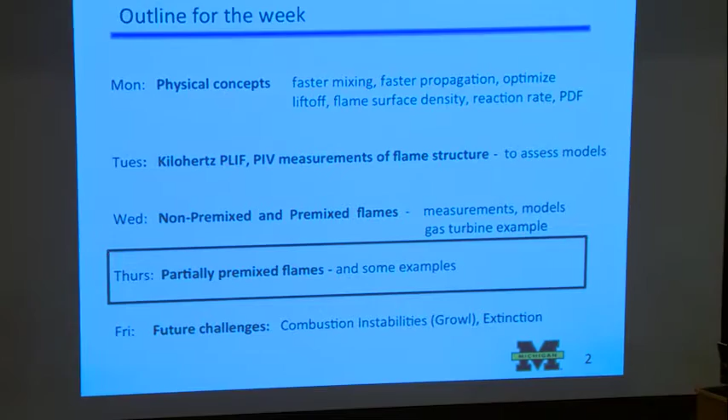Yesterday I told you about the non-premixed work, some simple models, and the database work done by Rob Barlow and others at Sandia, and Dreizler in Darmstadt. For premixed flames, we have several - 4 or 5 models - being used. Partially premixed flames is relatively new, and I'll give you some papers to look at if you're interested.

So first I'll define partially premixed combustion. This is not fully agreed upon by the community, but I think we're starting to agree that partially premixed means sometimes there are premixed flamelets and sometimes there are non-premixed flamelets. Now, the only thing we've considered is flamelets. If there's a distributed reaction zone, that's another situation requiring even more complex models. But let's limit ourselves to flamelet type models and measurements, where both premixed and non-premixed are present.

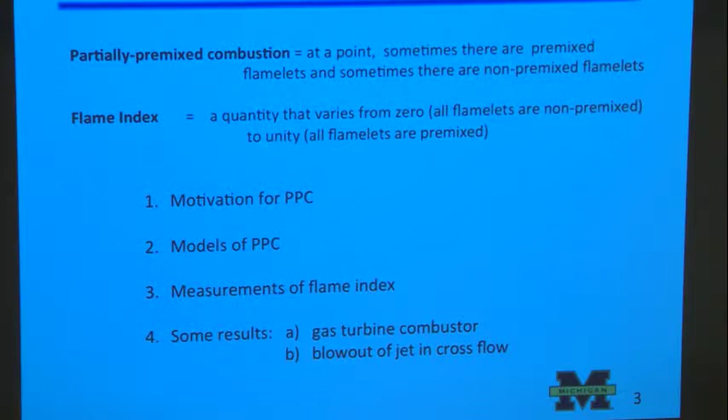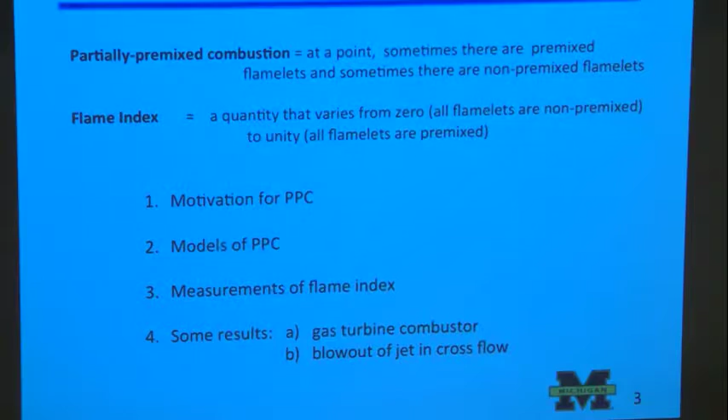Takeno from Japan had a group of students working with him doing DNS, and they analyzed a lifted jet flame. They found that at the base of the lifted flame there were regions of premixed flamelets and regions of non-premixed flamelets. So they started using this flame index, which we're starting to call the Takeno flame index. It's a quantity that varies from 0, if all flamelets are non-premixed, to unity, if all flamelets are premixed. This will help us model these problems.

So I want to talk about motivation, some models, some measurements that we've done, and measurements from people in other labs, and how this might apply to some problems.

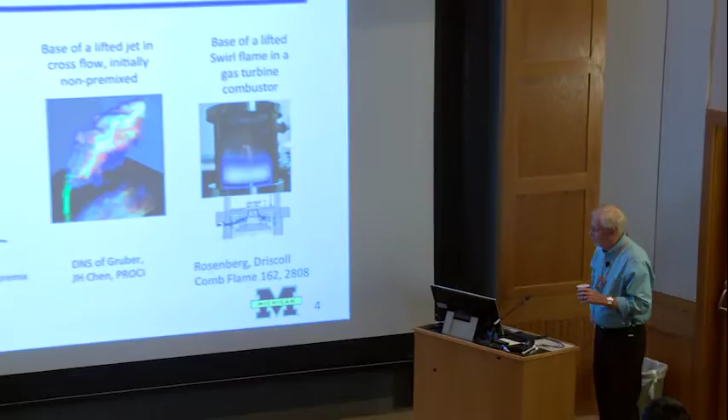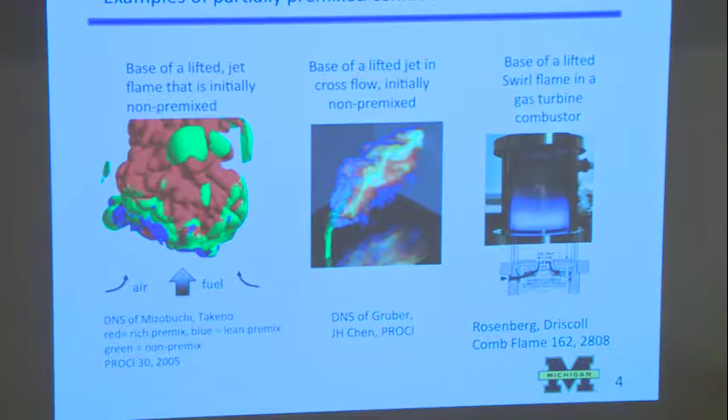Here is the DNS of Takeno and Mizobuchi in Japan. They had a very large computer. They only dealt with hydrogen and air - today we can probably do a little better, maybe methane air, but a simulation like this would be hard to do with complex hydrocarbons even today. They have a lifted jet flame, with fuel coming out of a tube and air being entrained in.

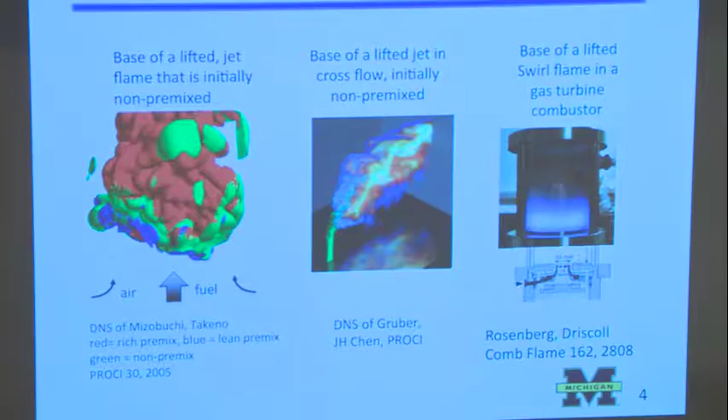The red is the rich premixed region, the blue is the lean premixed, and green is non-premixed. You'd ask, where's the triple flame? I think you could argue there are some triple flames in there - the triple flame would be non-premixed, shown green, with some red and blue on either side of it.

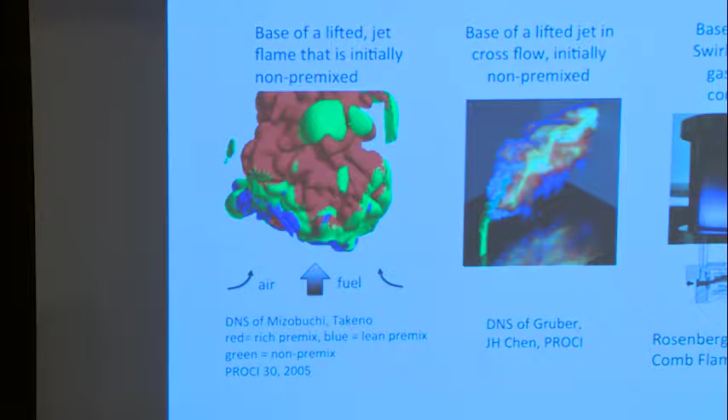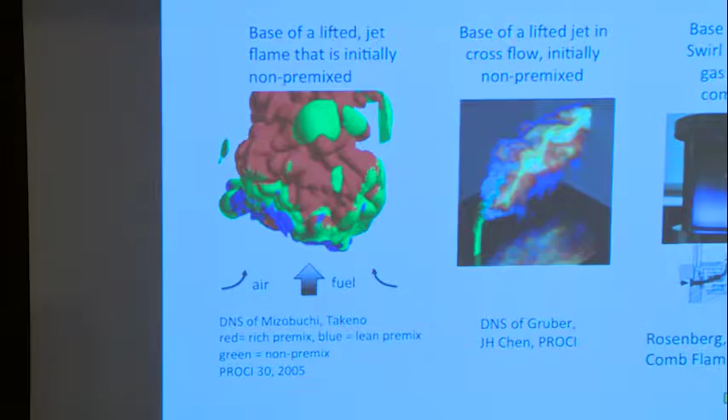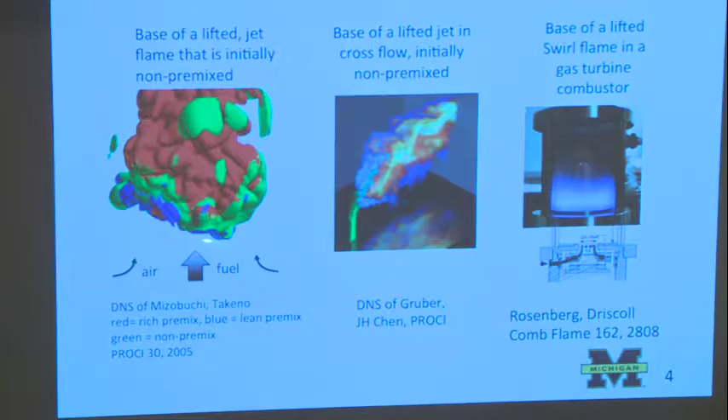But the other question is, where's the flame base? You can see it's three-dimensional and unsteady. In the past concept, the base of the flame - let's say right at this point - has a propagation speed trying to move upstream, and that would be the blue lean premixed region. This blue region would try to move upstream at some burning velocity, and the gas right at that point would be coming at it at some velocity. If the two were matched, then at least at that instant, this region would stay there.

But then at a later instant, the gas velocity would be higher, and it would push this blue region up, and maybe the gas velocity would be lower over here, and it would allow this blue region to come down. So you can see that it's clearly three-dimensional, and even with a laser light sheet, you're not going to solve the problem. You need three-dimensional diagnostics to do the experiment. You need three-dimensional DNS. So it's a tough problem, but a very important problem.

I gave you some formulas last time that said the height of the liftoff region is proportional to the velocity of the fuel coming at it, and inversely proportional to the laminar burning velocity squared. So you raise this velocity, it lifts off; you put some hydrogen in here, and it'll go to a lower, more stable location upstream.

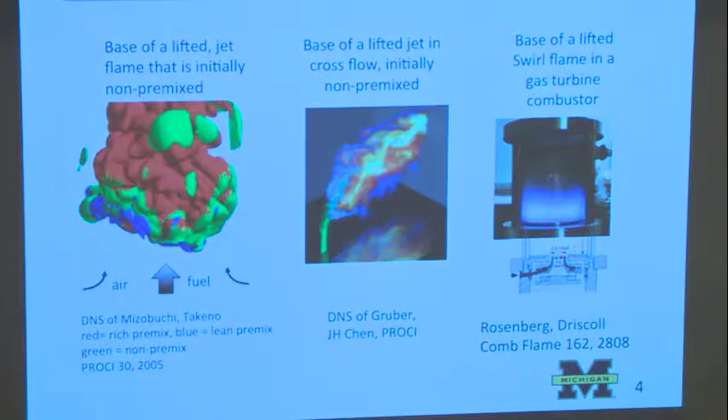Andreas Gruber, who's from Europe, I believe Norway, and Jackie Chen, who's at Sandia, published this work in the Proceedings of the Combustion Institute. Another example is the DLR burner that Wolfgang Meier and his group developed. We ran it, and a student named David Rosenberg ran it, and we looked at the degree of partial premixing in that burner. I'll tell you about it.

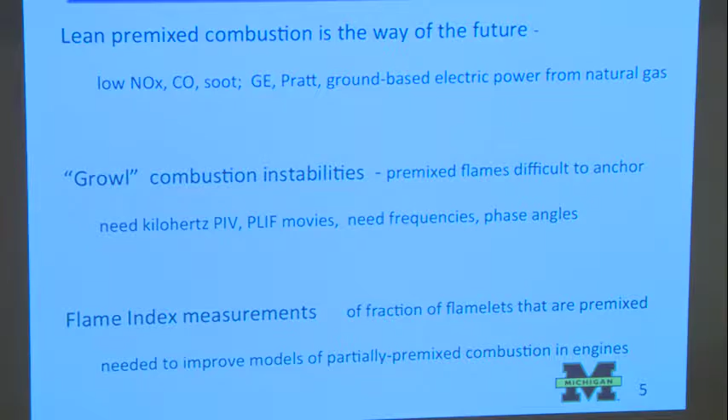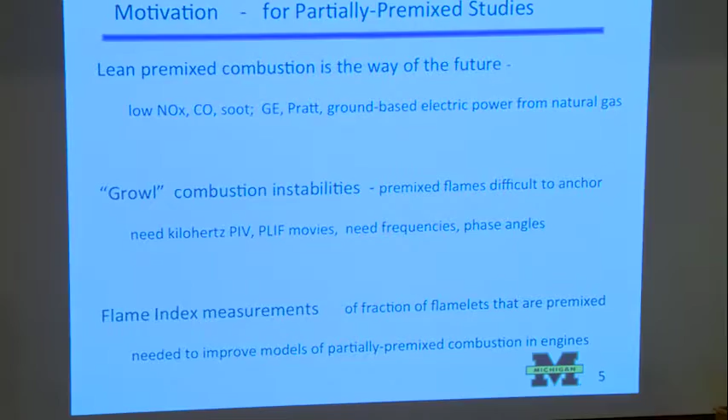So lean premixed is the way of the future, whether it be with a liquid fuel that you vaporize in some way and then mix it. You want to mix the air in as quickly as possible to get low NOx, low CO, low soot. And there are a number of designs used by the jet engine people to get lean premixed conditions.

And if you're using natural gas on the ground to make electricity, you definitely can do lean premix, because if it growls a little bit, it's kind of noisy, but not too bad. But if you're flying around and it's growling, that's not good. So you have to get rid of the growl instabilities, especially in aircraft applications. And you need to study everything with high-speed diagnostics because everything is oscillating in time. And to model it, you need things like frequencies and phase angles.

I'm sure Professor Candel is telling you all about this in another lecture. What I want to talk about right now is flame index measurements - what measurements you might want to make to get going in this field.

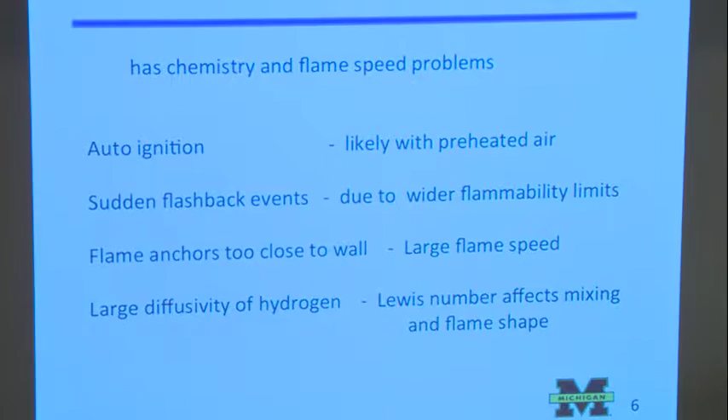Autoignition. Now, if you preheat air and premix it with the fuel, there's a chance that it won't be burning, and then all of a sudden it'll burn. So in any of these premix type devices, a big problem is when you first start it off, you inject this premixed mixture into a chamber, and you light it off - it's like your barbecue at home, when you barbecue.

You really don't want to leave the fuel on for a long time and then bring the match over, right? You've probably done that - you've created a premixed combustible mixture and you light it, not good. It's better to have the ignition source always on and then slowly bring in just the fuel, and whatever air is around will light and get this lazy yellowish diffusion flame, and then you add in the air and it's blue and intense.

This is also a problem with rockets. One of the big problems with igniting a rocket is that you have to be forcing hydrogen and oxygen into a chamber, and it has a little tiny throat in it, so it's almost a closed chamber. It's hard for the gas to get out. And then you ignite it, so rockets can explode quite easily if you don't have a good flow going through and if you don't ignite them in a gentle way.

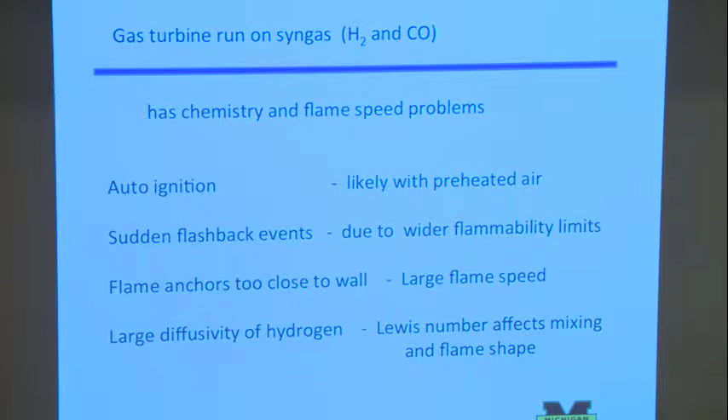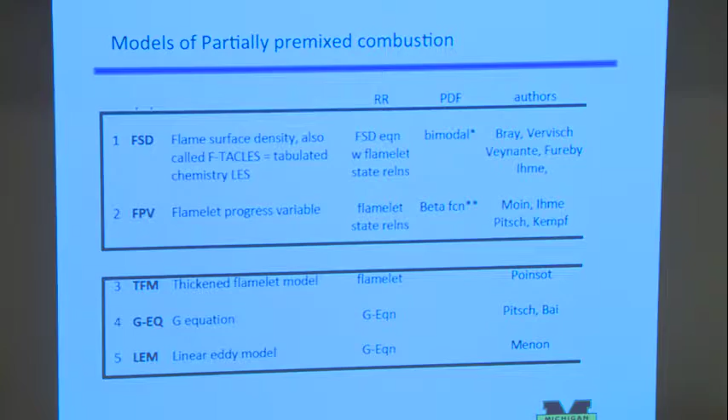If you have hydrogen, as with syngas, the Lewis number can have a big effect, and it's hard to model. So the next step is to ask how we'd model something that's partially premixed, sometimes premixed, sometimes non-premixed. The five models I put up here are pretty much the same ones people use for premixed combustion. But premixed is harder to measure and model than non-premixed, which is fairly straightforward because it's a mixing problem - the chemistry is pretty fast once fuel and air contact. Premixed is a wave phenomenon where everything's mixed, and you need the wave to propagate at the proper turbulent burning velocity. So you have additional criteria - you don't worry about mixing, but you do have to worry about propagation.

Flame surface density approach, filtered tabulated chemistry LES, pushed by the British at Cambridge and the French - I see a Swedish person there, and a German person, so it's definitely a European effort. This next one is more the Stanford and German combined effort using a flamelet progress variable.

I'll tell you how you'd add this for partially premixed combustion. I mentioned this thickened flamelet model on the first day - I won't say much about it, but remember you can make the flamelet as thick as you want if you artificially slow down the chemistry with unrealistically low Arrhenius factors, making the chemistry really slow, and also thicken the flame by making the heat diffusivity unrealistically large.

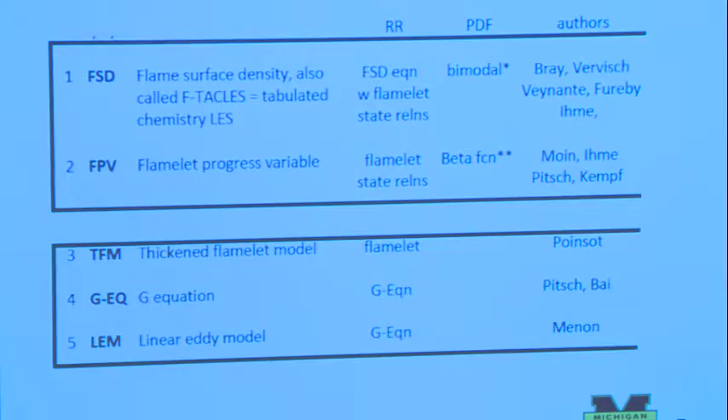Poinsot argues that if you do this the right way, the two effects counteract each other to give you the right burning velocity, but work together to give you even thicker flamelets, so you don't have to resolve anything thin anymore. But the question is whether that's a real flame or not. These other models are useful because they can handle partially premixed combustion, but they're not completely developed. If you want to read more about partially premixed combustion, it's hard to know where to start because there isn't a dedicated section on it in the literature - you have to dig a little.

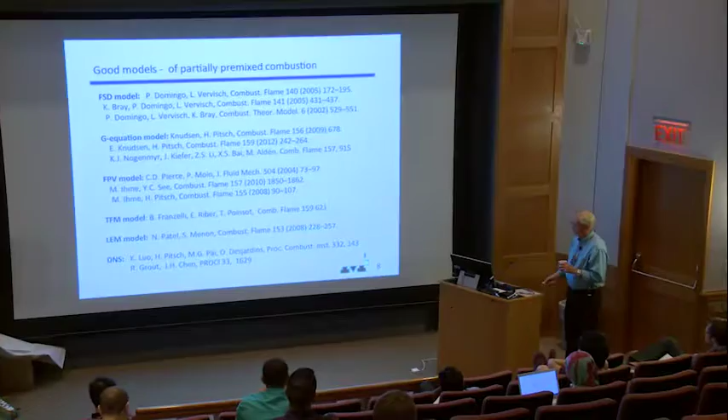Nayan Patel is at GE in Cincinnati, and I've interacted with him - he's a very, very bright young person. Please don't tell him I said GE uses bad computer codes, which I said the other day, because he's one of the people who knows how to write really good modern LES codes. But as far as I know, they don't let him design engines yet with that - it's a little bit early.

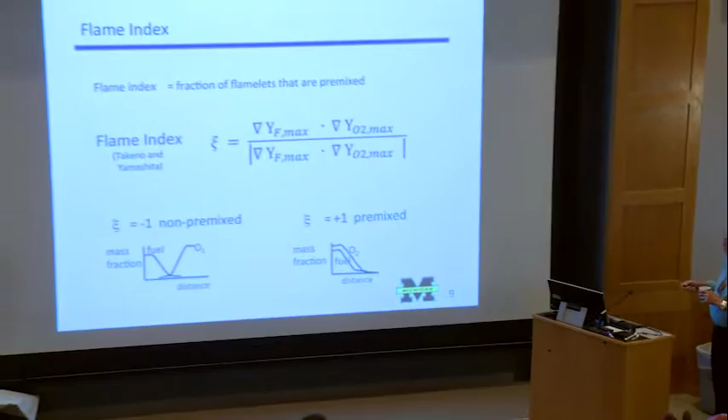Some French and German researchers worked together on DNS. So you may have heard of this flame index - it indicates the fraction of flamelets that are premixed. If you look at a non-premixed flamelet, a segment of a turbulent, wrinkled, continuous flame, you'd see oxygen on one side and fuel on the other. By Fick's law of diffusion, the O2 diffuses inward and the fuel diffuses inward, and where they meet is where they react.

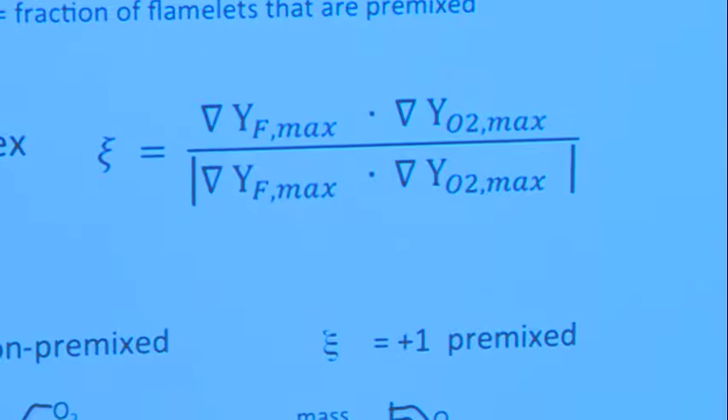Whereas in a premixed flame or flamelet, the fuel and O2 are already mixed, so they both diffuse down the gradient together, and then react once they get hot enough. Takeno defined this quantity: del YF is the gradient of the fuel, so this gradient vector points in the direction YF is increasing. If YF is going up in the x direction, this will be positive; in this case dYF/dx is negative along what we call x, so the gradient is negative - and the gradient of O2 here is also negative, so they're both negative.

Now we just want one number for this segment of the flame. We don't care about the gradient here, here, or here, so we'll take the maximum value. We'll look at the gradient, and right in the middle there's a maximum slope. We measure that number and multiply it by the slope here that's maximum, not up here, not down here, but right here, and take the dot product.

In this case, they're both negative vectors, so the dot product is positive. Then we divide by the magnitude of that vector, so this number can either be +1 or -1, but nothing else, because we're automatically normalizing by its magnitude. So in this case, the flame index is +1 because we have a minus number and get a plus number. In another case, we'd have a minus number and then a plus number, so this becomes negative on top, and the bottom is an absolute value, so it has to be positive. So this becomes -1.

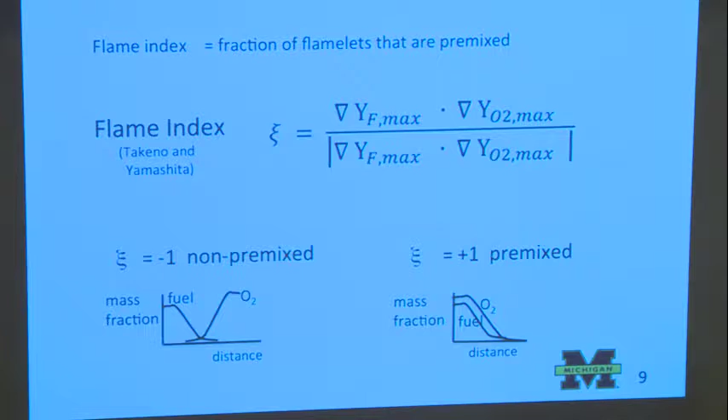Not too complicated, if we could just figure this out in a turbulent flame. Now, why would we want to use this flame index?

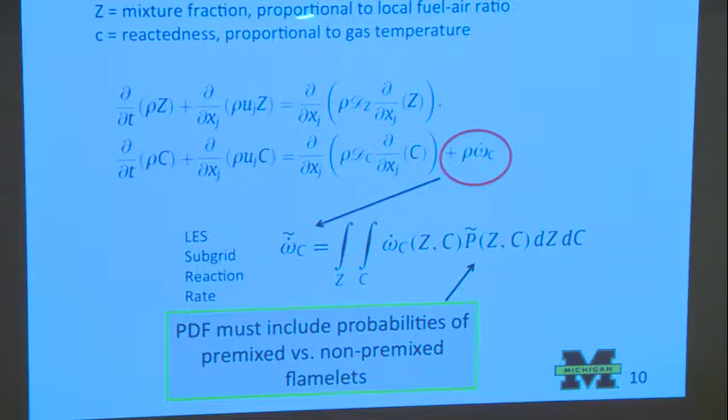All the models that attempt to do partially premixed combustion involve a Z equation and a C equation. Z is the conserved scalar, the mixture fraction. You can think of it as proportional to, or depending on, the local fuel-air ratio, but it's really the mass fraction of H atoms properly normalized. C is defined by different people in different ways, but we can think of it as a non-dimensional temperature. So this is like the energy equation, and this is the reaction rate term.

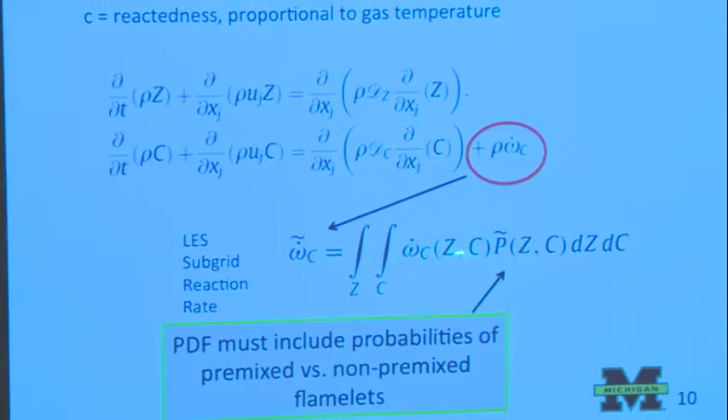As we said before, we can close this problem if we just make two assumptions. First, we assume we have flamelets, so we get the reaction rate as a function of the independent variables Z and C through some Chemkin mechanism for laminar flames. Then we have a PDF that's a function of Z and C. We integrate these two and get the mean reaction rate.

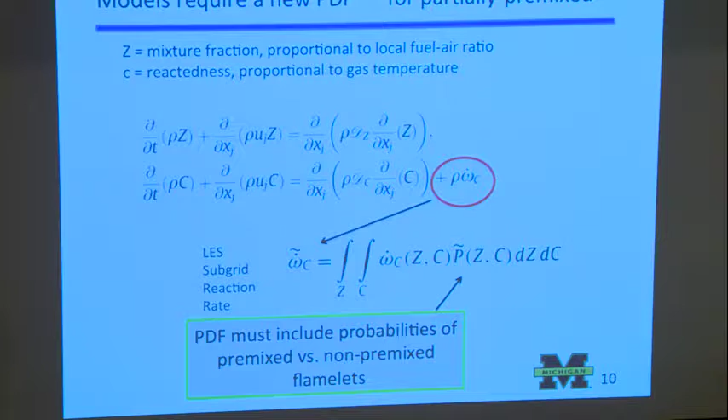But the problem we have now is that sometimes we have non-premixed, sometimes we have premixed combustion. So Knudsen and Pitsch suggest an approach, and Domingo, Bray, and the French group suggest basically a similar approach, but with different modeling equations—it's pretty much the same thing.

The PDF of this flame index is bimodal. It can only take on two values, 0 or 1. Xi can only be 0 or 1, so you think of it as two delta functions, one at xi equals 0 and one at xi equals 1.

So when you integrate... let me just check one thing here. Okay, I didn't change that—thought I did, but I didn't. This is the fraction of flamelets that are non-premixed. Now, what it really should be is the integral of P d xi around xi equals 0, because the PDF is actually a delta function, and the area under the delta function is a number. I think I did it right on a later slide.

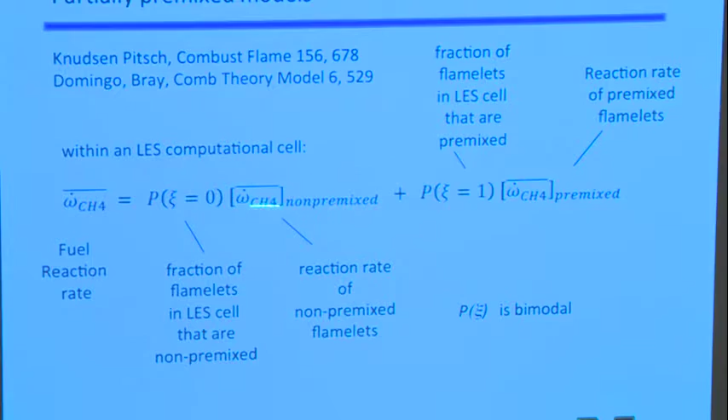In other words, we just get this number out from this calculation, and then assign it to one of the corners of the computational cell and do the rest of the LES simulation on the grid. So we don't really know what's happening inside the cell—we just say whatever is happening will follow this equation. The fraction of flamelets that are premixed would be similarly computed.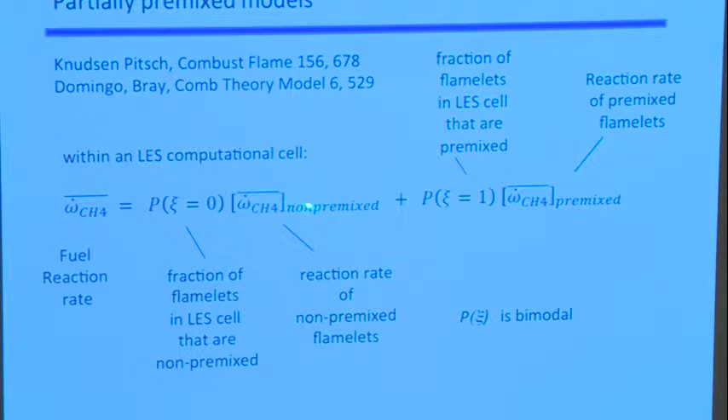So it's sort of like a switch. Let's say 50% of the flamelets are non-premixed—then you'd run your non-premixed flamelet calculation, where you take the mean and variance of the PDF and put them into a non-premixed flamelet state relation to compute this number. Then you repeat the whole process for the premixed state relation. So you're running Chemkin to get a whole lot of non-premixed flamelet solutions, and then running Chemkin again to get a whole lot of premixed flamelet solutions.

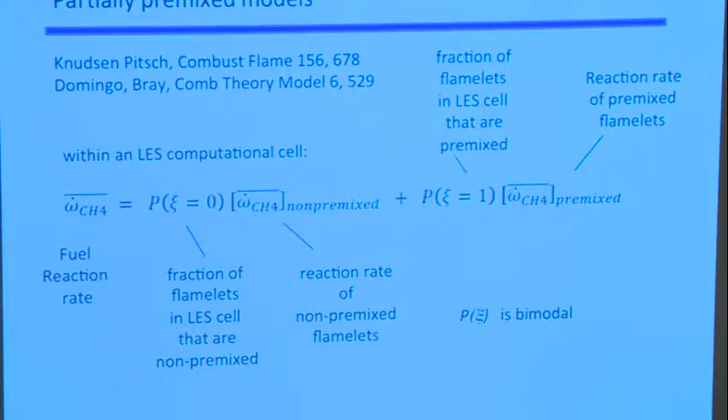And if you fold them in properly, you get hopefully the right answer. Okay.

That's the idea of the two major models that I'm going to reference and talk about. And then once you do that, you say, how do we assess something like this? We have to find an experiment that's partially premixed.

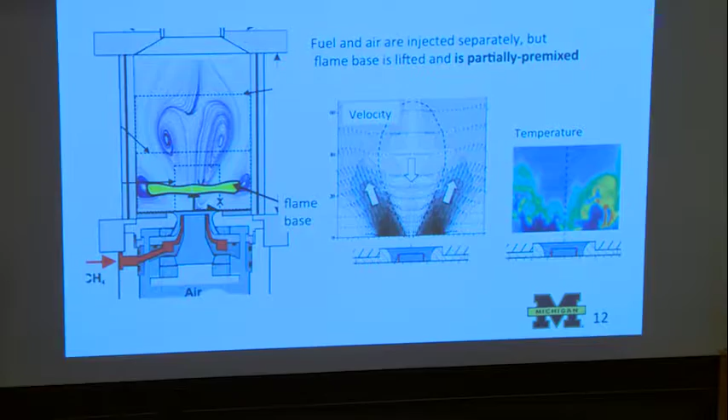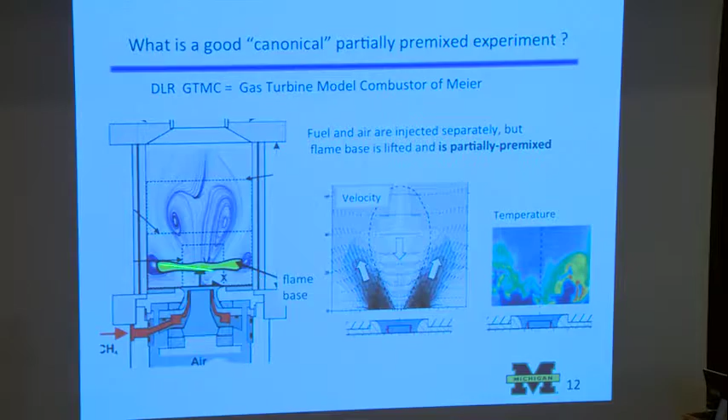Well, I showed you that there are three examples: the lifted jet, the jet in a crossflow, and this is also a lifted, initially non-premixed flame that is in the DLR burner. You put fuel in here, you have swirling air coming around, both on the outside and the inside. And you end up with a fairly flat-looking flame, and it's mixing a lot in here, but not completely.

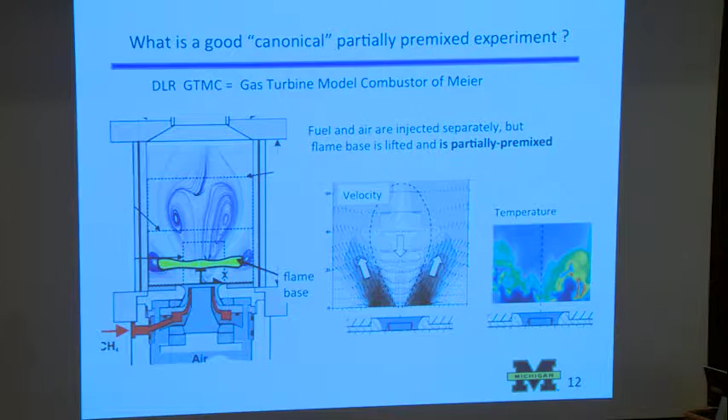So it's not a premixed flame. Some of the fuel and air haven't fully mixed, but a lot of the fuel and air have premixed. The work at DLR, they made a lot of measurements, but they didn't measure the flame index. So they have the velocity field, temperature, lots of other variables.

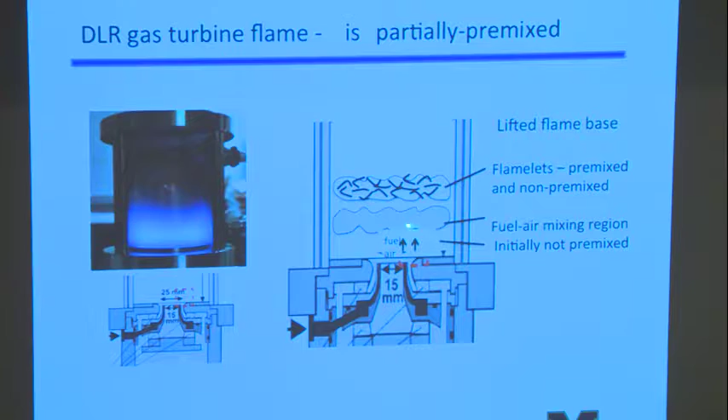And this is what the flame looks like running in our lab. David Rosenberg ran it, and it looks pretty flat. It sort of has a hole in the middle, but you don't see that from here. But you can see that there should be some flamelets here, there should be mixing here, and nobody had really looked at the flame index before.

So I asked David - actually this was on a previous NSF grant, which we're very happy to have had. David did a great job. He's finished his PhD and published papers. He's got a job, which is number one, right? And he actually got a job in the city he wanted to work in, which is Washington, D.C.

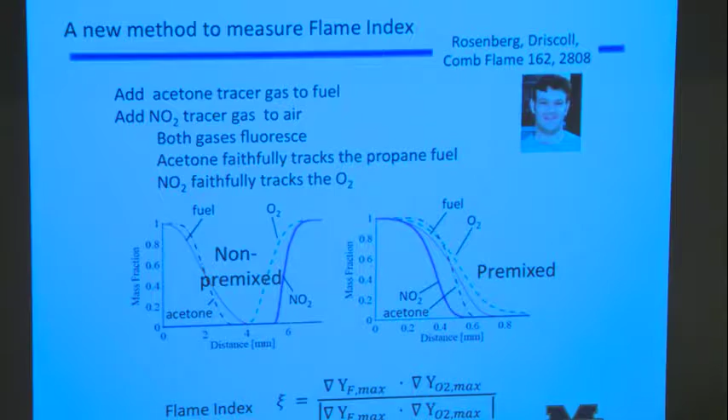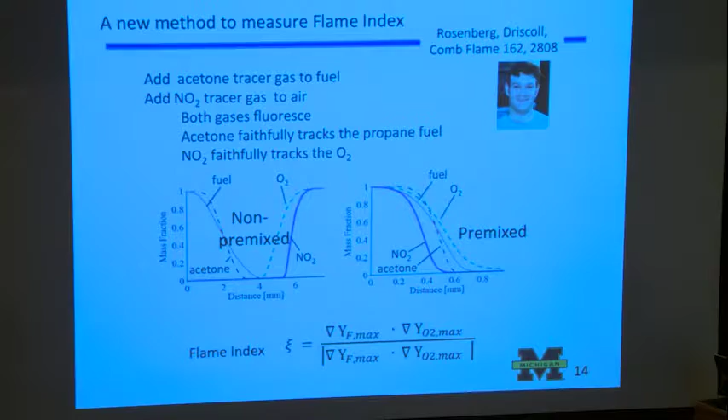He did his postdoc at NRL, which is in Washington, and then both he and his wife wanted to stay there, and so he got a research job that's partially research and partially governmental related in Washington. He's really happy doing that.

But what I asked him to do is I said, well David, can you find some way to measure this flame index? And the first thing he did was he looked at all the diagnostics that Ron Hanson, the Stanford people, and all around the world - Marcus Aldén in Sweden - everything. And finally we realized that we'd have to add a tracer to the gas.

Because there's no way you can measure these mass fractions. We need images to get the gradients. We'd like to have three-dimensional images to get the three-dimensional gradient, but we can only do it in a sheet. So you need images, so you need fluorescence. What fluoresces? Well, you can't really find a fuel that fluoresces by itself.

Unless you run pure acetone, and we didn't want to do that - that was really sooty and nasty. And so we decided we'd add a little bit of acetone to propane. The reason is that both acetone and propane are pretty heavy molecules. They both have diffusivities, molecular diffusivities that are fairly small. And if you look them up, they aren't that much different.

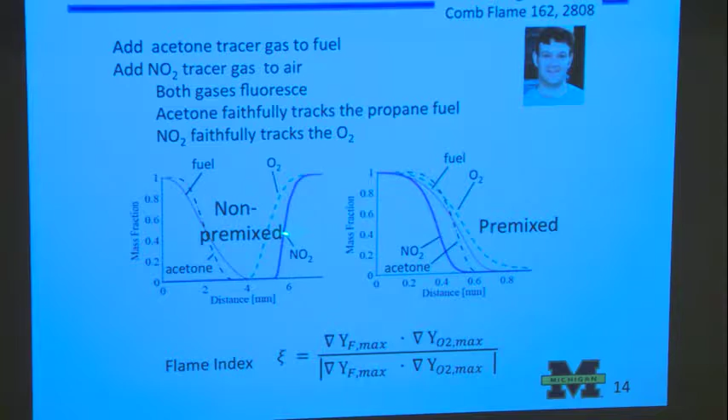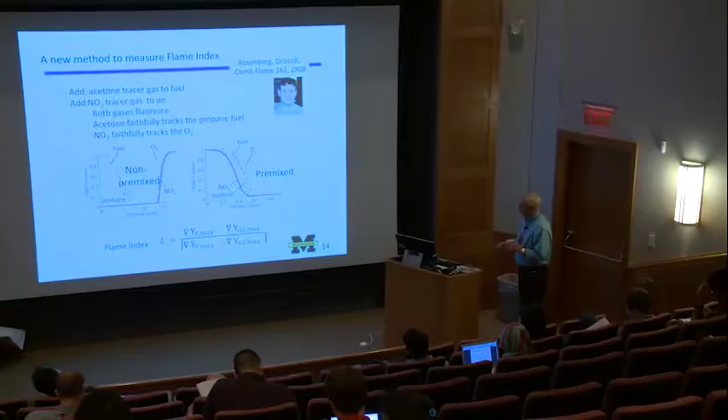Now, the one mistake we're making is that the location where we say the gradient is, is slightly disturbed from where we measure it. But David has a way of accounting for that. In the premixed flame, it's the same situation.

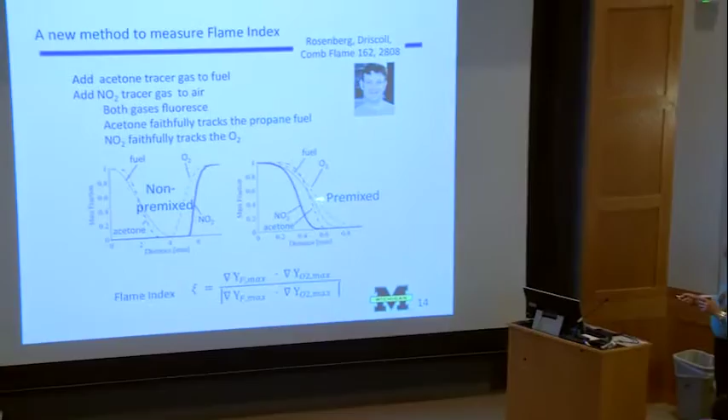The O2 drops as you go into the flame, and the NO2 drops, but they don't drop at exactly the same place, but their gradients are both negative. And even then, we don't care about the magnitude because we divide by the magnitude here. So all we want to be sure is that this quantity has a negative slope wherever this quantity has a negative slope. And it does, except for that there's a little offset - now this is about 1/10 of a millimeter, a little more than 1/10 of a millimeter.

So it's not a huge problem because we can't measure much more accurately than 1/10 of a millimeter anyway. This is kind of like our spatial resolution.

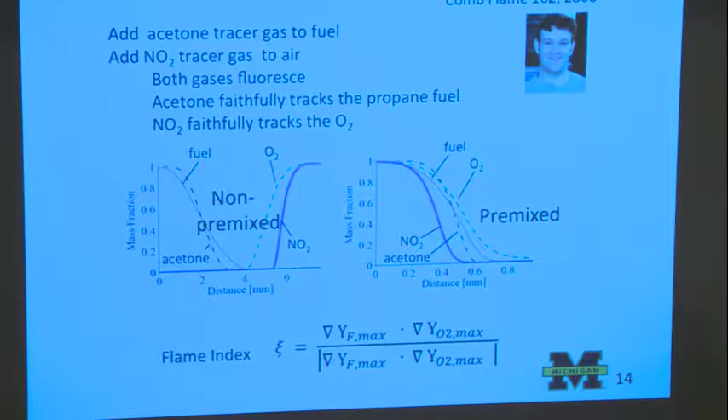So this looked like a promising idea. As it turns out, we were down in the lab and we couldn't get enough signal out of all this. The NO2 didn't have enough signal, and this is what I told you earlier. We realized we needed a better camera that was red sensitive, and so it looked so promising we decided we'd just buy a new camera, and we did.

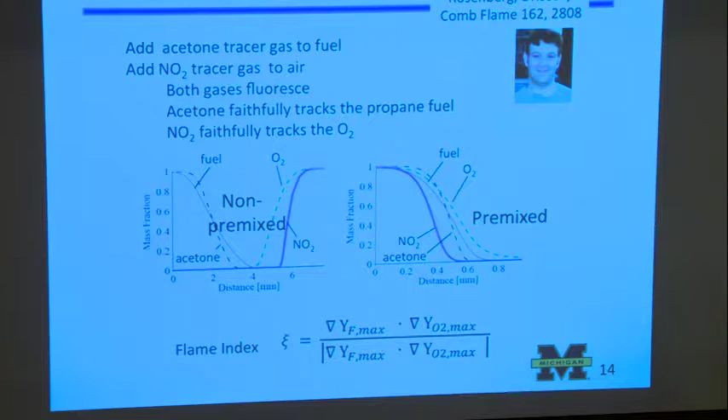David went from no thesis to thesis in a couple of weeks. Actually, we borrowed the camera - you may have this experience. We borrowed a camera from the company that sells them, and he said, 'Yeah, you can try for a week,' and we did it, and like eureka! David goes, 'Hey, I'm going to get out of here.' So we bought the camera, and it worked.

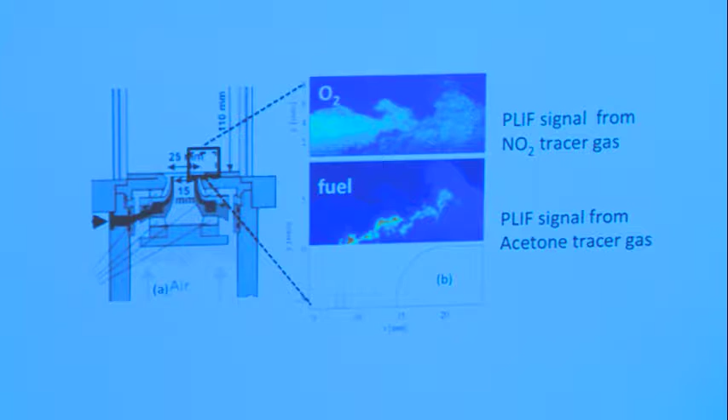But now here's what you get if you put NO2 in the air in a highly turbulent situation with a flame present. You get the NO2 is all over the place, and we're arguing that it's tracking the O2 fairly well. And if we put acetone in the fuel, you get pictures like this in here, and we're arguing that it's, to the best of our ability, tracking the fuel.

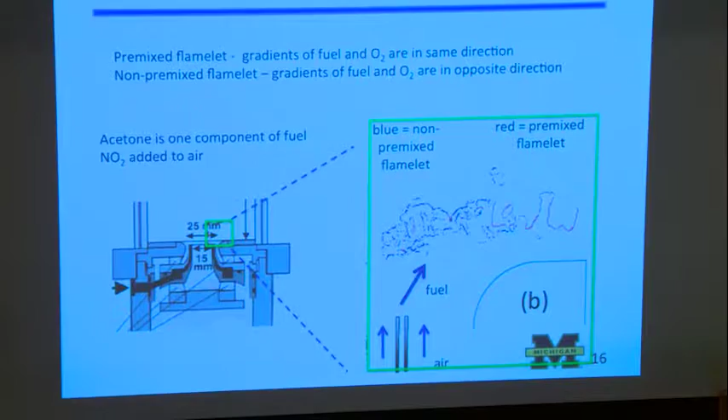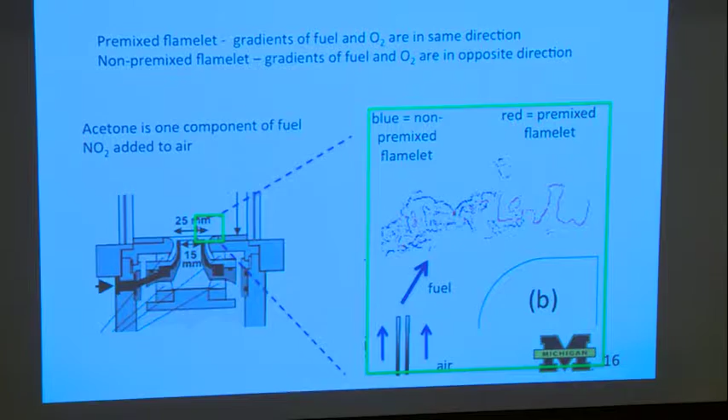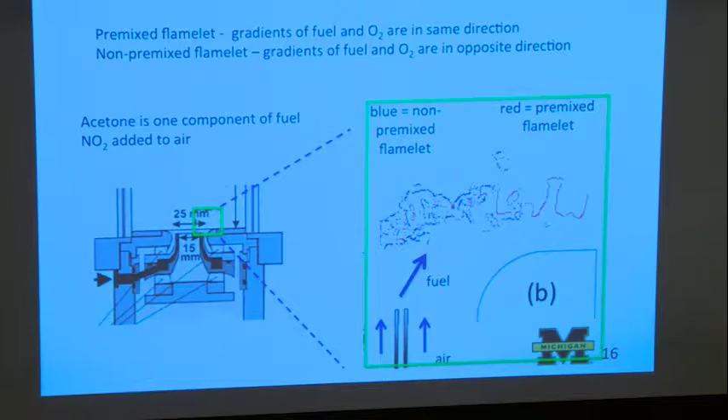Then we take the derivatives, we take the gradients in space, so the derivatives in two directions. And that's, once you have the data digitally recorded, you can just use MATLAB. You have to remove any background noise, and we did this in laminar flames first to make sure we knew what we were doing, and we got good results in the laminar flames because we know which direction the gradients are, and we would have a perfectly premixed laminar experiment.

We'd have a perfectly non-premixed laminar experiment, and as you might expect, we could easily see that it was giving gradients in the right direction. And he also found that he could get enough signal to noise with a lot of work, about a year's worth of work just to get the pictures on the last slide looking like the pictures on this slide.

Now, each pixel here is handled independently, so it gave us a real good feeling when we saw that we had very continuous-looking flamelets. Now, they're not completely continuous, and they're not really extinguished, we don't believe, at any of these points. It's just that the signal-to-noise is not good enough in some spots.

Okay, but we're not trying to, we're going to be taking averages of all this anyway. So we're going to average all the red regions and all the blue regions, but the blue regions would be surrounding globs of fuel, where air might be coming in on this side and fuel coming in on the other side, whereas these red regions would be surrounding premixed reactants that we don't know which - well, I can't tell from this picture, but from his data, he can see which way the reactants are coming in. So I'm going to guess that they're coming in upward.

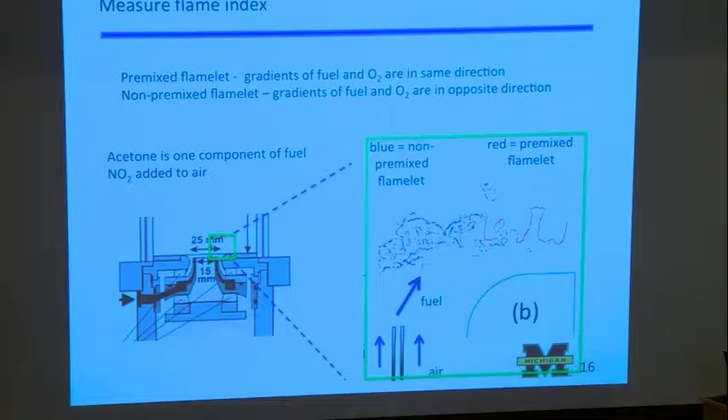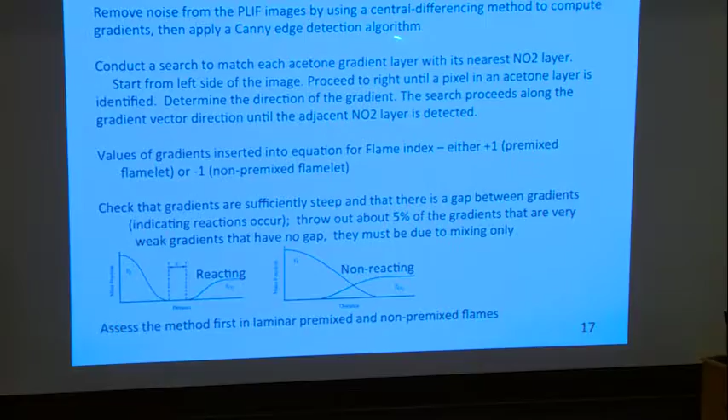No one had tried this before, and it seemed to be working pretty well. He had to remove noise from the images and apply an edge detection algorithm just to make sure we're looking for gradients in the right direction.

Then he conducts a search to match each acetone gradient with its nearest NO2 gradient layer, because we want to find out if the NO2 gradient nearby is in the same direction or opposite direction. He started from the left, proceeded to the right of the image, and his computer code would identify a pixel that's in an acetone layer and determine the direction of the gradient.

Then he determines the direction of the gradient and proceeds along that vector until the next layer is detected. If there's no layer nearby, there's no flamelet there—it could just be a gradient of acetone with no burning at that point. But we're arguing that if it's a premixed flamelet, he'll find an NO2 layer very close by that has the same direction of gradient as the fuel. And if it's non-premixed, he'll find another layer nearby that has the opposite direction of gradient.

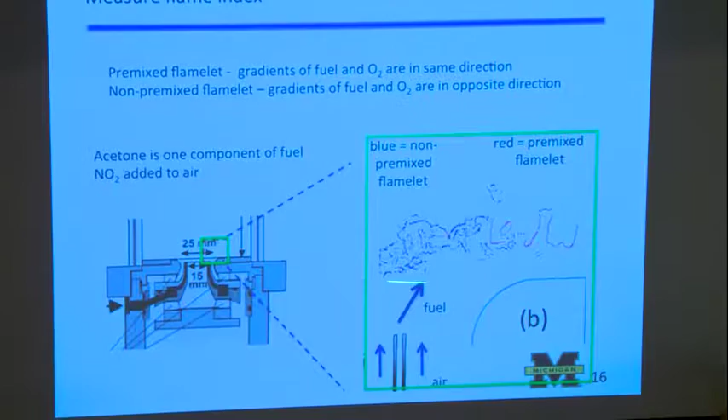The only thing we're trying to do is assign to every pixel on that flow field either a red or a blue color. Everywhere in this flow field he has data, and we just want to put either a red pixel or a blue pixel at each point, or no color if there's no flamelet.

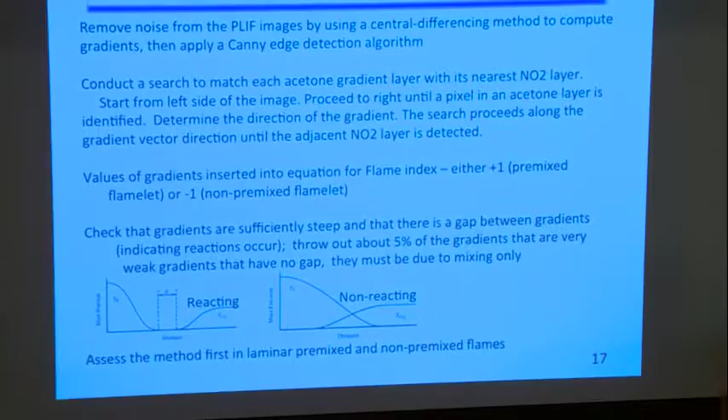As we did this, we realized there are lots of other things to check just to make sure we're doing this right. Imagine a reacting non-premixed flame—you have fuel coming down here and oxygen coming up here. In a real non-premixed flame you don't have much overlap of the gradients, because there's almost nothing there—they're burning. So the gradient here is this way and the gradient here is this way. You need to match these two up, and then take the maximum gradient of this profile, multiply by the maximum gradient of that profile, even though they're not at the same location.

If you can argue that's within the distance of a laminar non-premixed flame, then you're okay. So you can't use this flame index and get the two gradients exactly at the same location in a non-premixed flame. In a premixed flame you can, because the two gradients lie right on top of each other. But in a non-premixed flame there's going to be a distance between these gradients—that's what we saw in the laminar flames and in Chemkin.

There's very little overlap, because the acetone or fuel disappears—so where does it react? Actually you form hydrogen, H2, carbon monoxide, all the intermediate species, and even the oxygen breaks down into O and OH and all that. So in a diffusion flame you generally don't have a whole lot of O2 sitting right on top of the entire fuel—everything is broken down by the time they react.

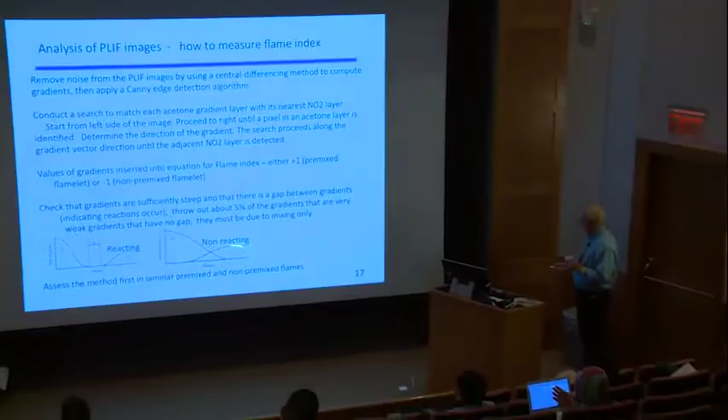So a typical flamelet has a gap between the fuel and the O2. But if it's non-reacting, the two overlap because there's no reason for them not to coexist—it's just some fuel mixing with O2. That's another check we perform to make sure we're doing this right. Could there be regions where the fuel and O2 look like this, but they're not burning, like an extinguished region?

So he looked at these gradients and threw out about 5% of the data, which would have indicated a non-premixed flame except that there wasn't a gap. So we said it couldn't be a flame, it must be non-reacting. He did that, and this is the kind of information we get.

He also did an uncertainty analysis. You're probably thinking there's lots of uncertainty and inaccuracy whenever you do something the first time. He did an uncertainty analysis, and this allows us to get numbers that are reasonably interesting, but with some uncertainty.

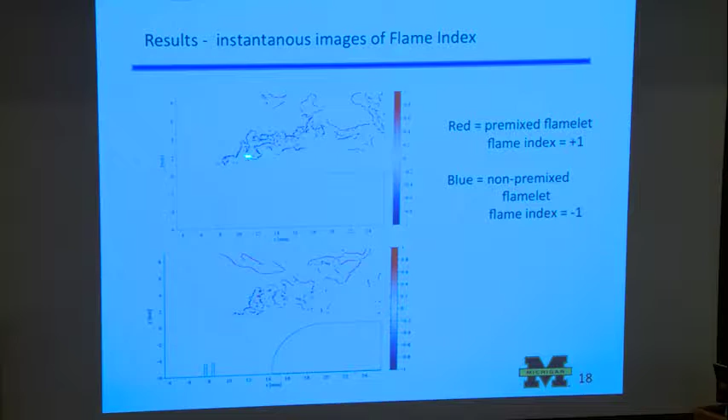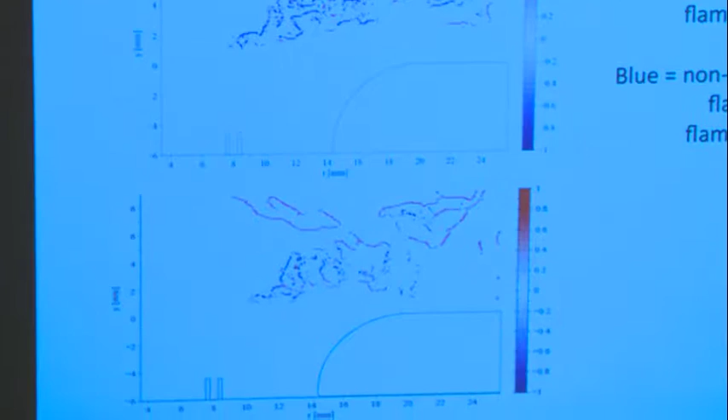The fact that he's getting these individual pixels to be right near each other means we're doing something right, because if we were doing it wrong, we'd just get random blue and red pixels everywhere. But we're resolving structure of continuous layers in most places, and you can see what you get.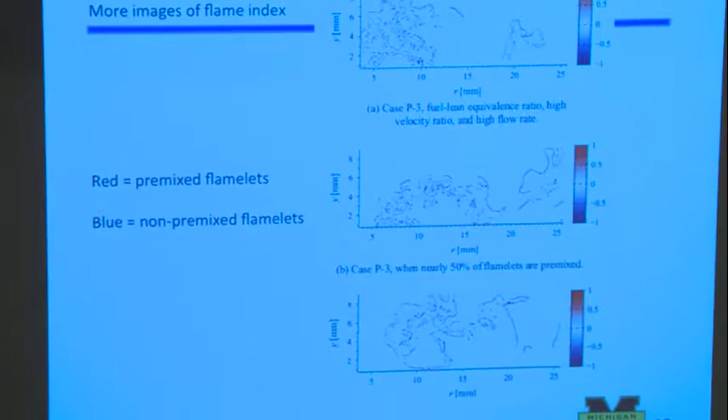We tried different equivalence ratios, different fuel injection velocities, and got a data set. But then, what would the modelers want? I visited Professor Bray in Cambridge, and I told them we were doing this, and they said, what do you want? He said, well, we don't want any of those pictures, they have no use to us. What they want are these kinds of statistical averages.

In this particular case, we're looking at the fraction of flamelets that are premixed. So what you do is you first identify whether you have red or blue flamelets, and then you count up how many you have. Like in this region, you look at thousands of images, say 2,000 images, and you say, if I have a flamelet there, is it a red or a blue flamelet? It's just a conditional average. It's not the average flame index at that point, because the average flame index is a really small number, because most of the time there's no flamelet. But this is a conditional average of whether, if a flamelet is there, is it red?

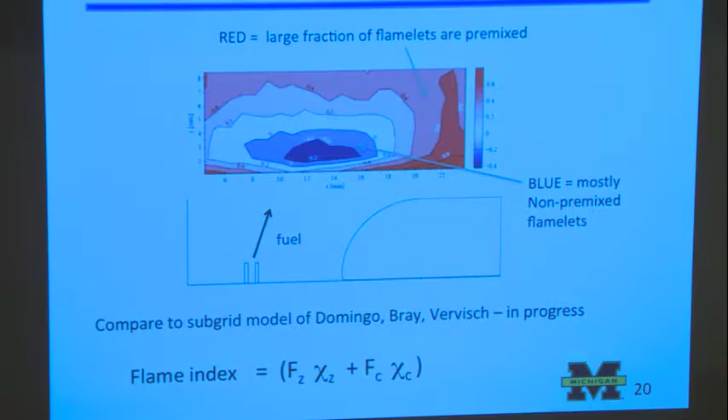And if it is, then you get these big red regions. And if a flamelet is there, is it blue, which would be non-premixed? This is what you get. Now the two numbers should add up to 1. If it's not red, it's blue.

So this is just the probability of the flamelets that are premixed, and the fraction of flamelets that are non-premixed would be 1 minus this number. But you see here, this is like 80% of the flamelets are premixed, and down here it's more like 20% are premixed. So in here it's 80% non-premixed, so this is mostly non-premixed.

Now we can only look above the burner. This is the center line right here. There's an annular fuel injector, and so the fuel comes up and goes like this, so it isn't too surprising that where we can first see flamelets above the fuel tube, they're non-premixed, and then as they mix in with a lot of air, and the fuel and air mix, you get more premixed.

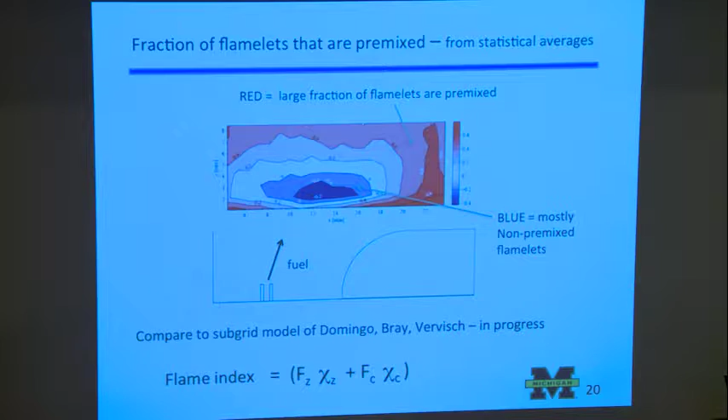Let me go on here. These are more, this is the same run, except at different times you get different pictures here. Sometimes lots of red premixed flamelets, other times lots of blue.

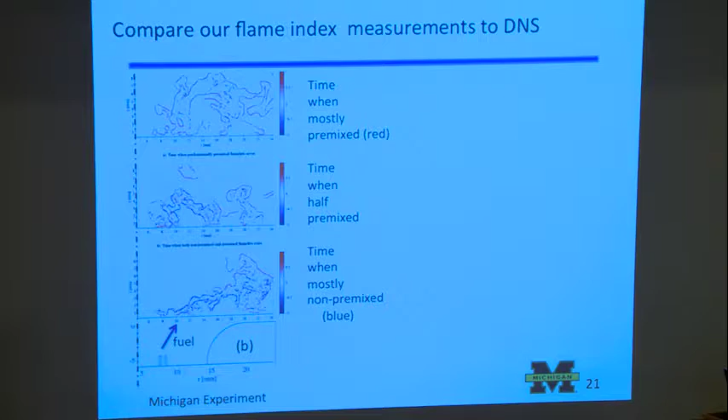And then we said, well, is there anything to compare this to in the literature? And no. But there are a few DNS simulations that are at much lower Reynolds number, but they have attempted to compute the flame index.

Now, Heinz Pitsch, and this is after we did all of this, we looked in, here's a paper by Heinz Pitsch, and Heinz has computed everything, right? If you're ever looking for something that's been computed, and you say, gee, I wish somebody had computed that, just Google his name, and he probably has done it. So we were overjoyed when we found that he had done DNS on a burner that was very similar to ours in geometry, but the flow velocities were much lower because he was limited with DNS to low Reynolds numbers.

But it's the same sort of thing, an annular fuel injection through an annular thin region here, and then air coming up here and air coming up here. I guess it's not too surprising since he's in Germany and we got the burner from Germany. It's kind of the canonical design.

So he showed that in his DNS they get red premixed regions here. Green was non-premixed, and it's very hard to compare this to this, but they look like they're outside. And then the black is where the fuel is, the center of the pure fuel, which he put in his proceedings paper.

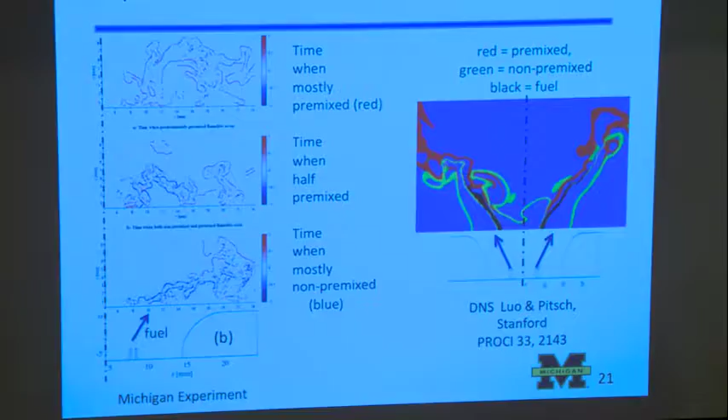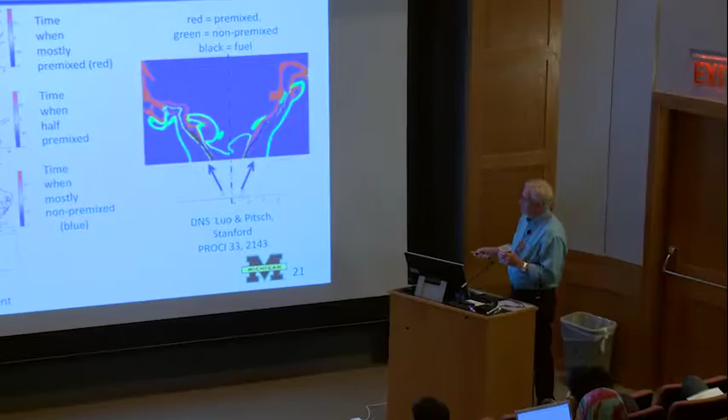So when we finally published this, we got criticism from the reviewers. Why don't you get a DNS that's a lot more realistic of your experiment? And my approach is, we're lucky we got this one, because it was an incredible feat to simulate this with DNS and to compute the flame index. So he basically has given us the flame index, and all we're arguing here is that these pictures are not inconsistent with these types of pictures.

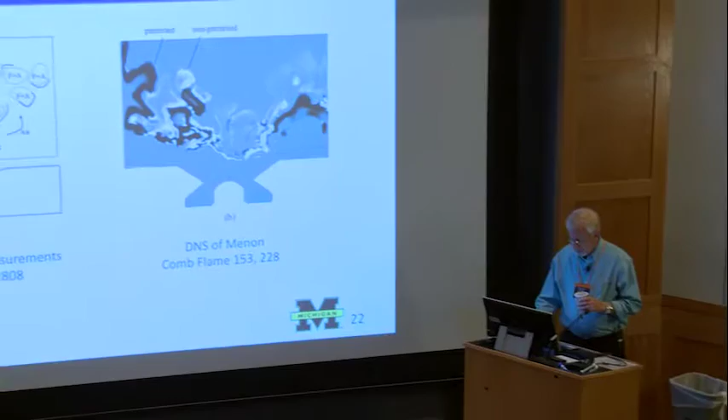And then, of course, we looked further and we found that Professor Menon at Georgia Tech had done a DNS of a swirling flame. It's a little different geometry and everything, but he put the premixed region in black and the non-premixed in white.

But both of these people realized the importance of getting this flame index. And our results are also, I guess, not in contradiction with this DNS.

What we're arguing is that most likely there's a core to this fuel jet. There's a shear layer. It's flammable somewhere in the shear layer, but it's not burning because the velocities are too high, and so it's a lifted flame. And then most likely there are triple flames, but I'm just guessing here because we couldn't find any strong evidence of triple flames.

For one thing, we're only in one plane, and it may be a triple flame at some other place. But if there were triple flames, you would expect a lean branch on the lean side and a rich branch on the rich side, and then a diffusion flame coming out the middle. And then you would expect that if this was all shredded apart, there might be fuel and air pockets, and there might be premixed flames burning around some or all of those pockets.

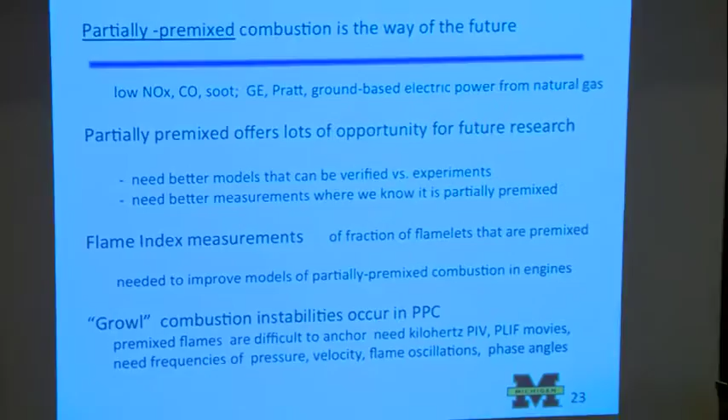I'll repeat some things here that partially premixed is the way of the future because of the low pollutants, because of the use of natural gas as well as syn gas. And most devices have a lifted flame because they don't want the flame base sitting right up on the injector plate, because that's too much heat transfer.

And so if you talk to GE, they'll say, oh, we have a good flame, and they never talk about lifted or blown out or anything. They just say it's a good flame, it's sitting about where they want it. And to me, it's a lifted jet flame.

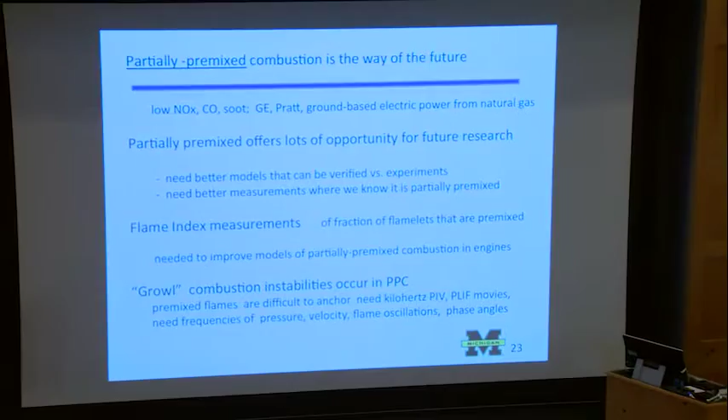It's partially premixed. Okay, we need better models, we need better measurements, but what we've done with laser diagnostics is show that you can analyze this. Now, if you had Raman measurements, you could do better than what we did, but you'd have to get a sheet because we want to take gradients, and a single point won't give you gradients.

So if you had a Raman sheet method, you could do better than us. You could get the actual fuel and O2 to give you a signal. I know at Yale, Marshall Long did some Raman sheet measurements some years ago, and I think the upshot was that, based on what lasers were available at that time, the signal to noise was not real great.

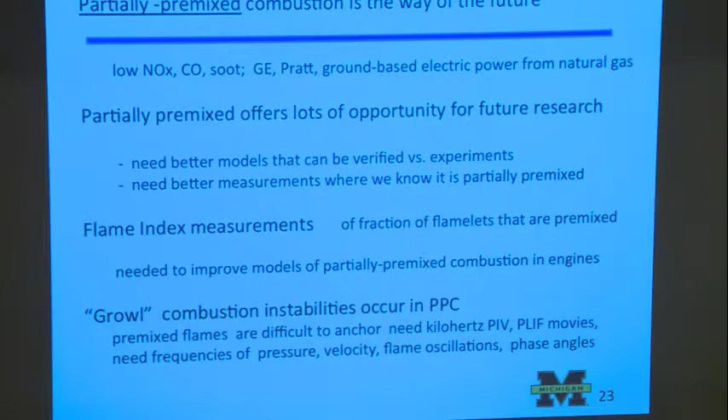He actually put the laser sheet in a resonating cavity. So he put two mirrors on both sides. So you take a laser sheet, hit it into a curved mirror, and it comes back on top of itself. And so it's like a laser—a laser works this way with two mirrors. And so you get the sheet to bounce on top of itself like 15, 20 times. So you get 20 laser sheets all in the same plane.

But that's really difficult to align, to get to work right, and so I haven't seen any papers since the Yale work on laser Raman sheet imaging. But that would be better, and maybe there's a better way to get fluorescence from some of the fuel or the oxygen. Now, I haven't seen any papers on getting O2 to fluoresce, or any fuel except for some nasty fuels to fluoresce.

So there are ways to get better measurements, and probably better DNS is what would help us the most right now.

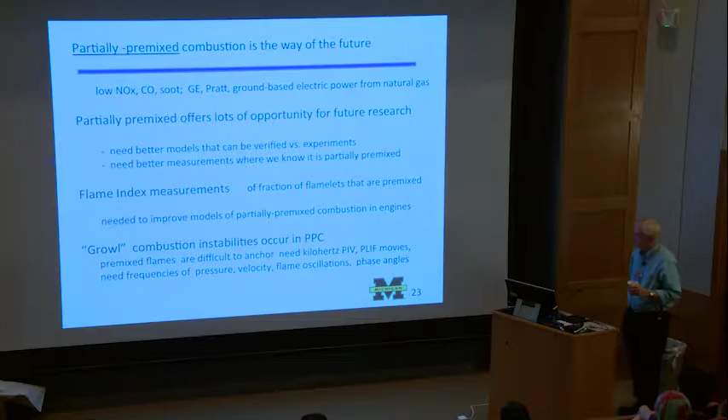And then all of this is important because growl instabilities occur, and there just isn't any good model that industry has to tell them two things: what is this growl and what's it doing, but secondly, when does it start? So a really big question is the incipient growl—that is, at what fuel-air ratio do we get these acoustic instabilities that Professor Candel talks about? So that's another big issue that I think some of you may want to look at.

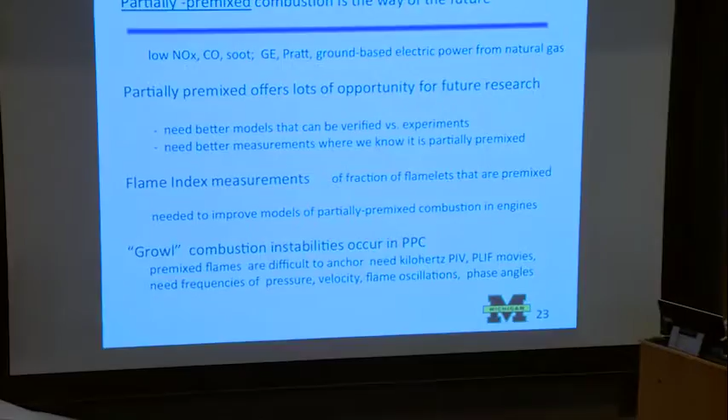What happens with these instabilities? I think I'll stop there because we'll take a little break and then I'll talk about models. And if you're expecting me to give you the answer, don't, because the models are pretty primitive, but we'll talk about them anyway, okay?